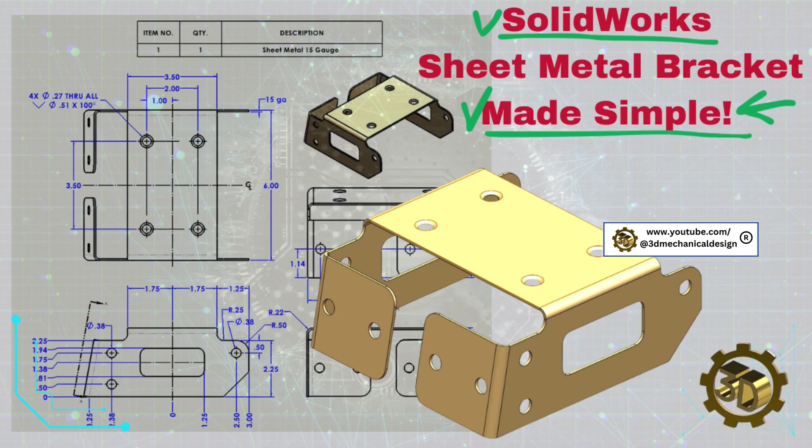Let's begin by reviewing the drawing specifications. This bracket will be fabricated from 16-gauge sheet metal. The component is symmetrical along its main axis, meaning we will model one half and utilize the mirror feature to create the complete part.

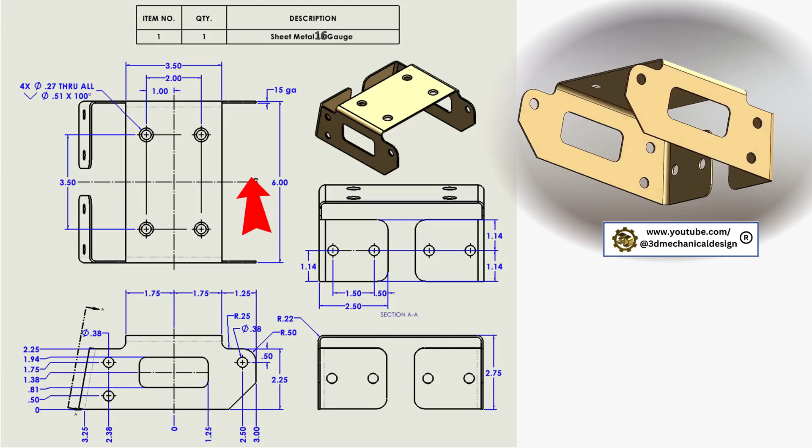Throughout this process, you'll utilize the following tools from the sheet metal and features tabs: base flange, edge flange, extruded boss, extruded cut, hole wizard, fillet and chamfer, and mirror.

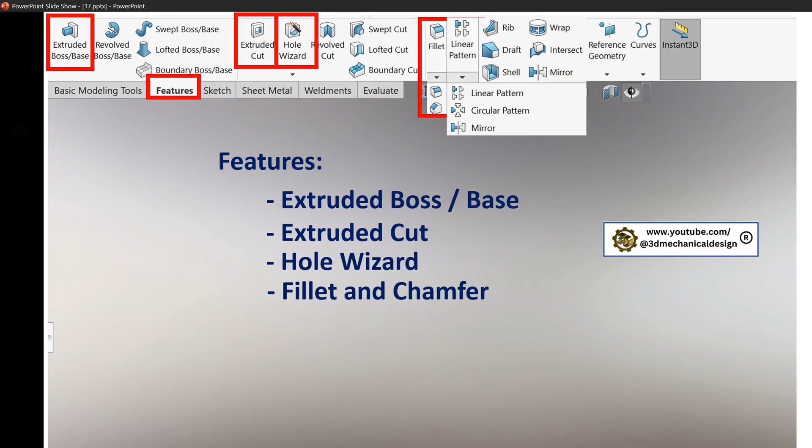Let's start modeling. Initial sketch: start on the top plane and create a center rectangle with dimensions 6.0 inches by 3.5 inches.

Access the Sheet Metal tab and apply the base flange feature, specifying a 16-gauge thickness.

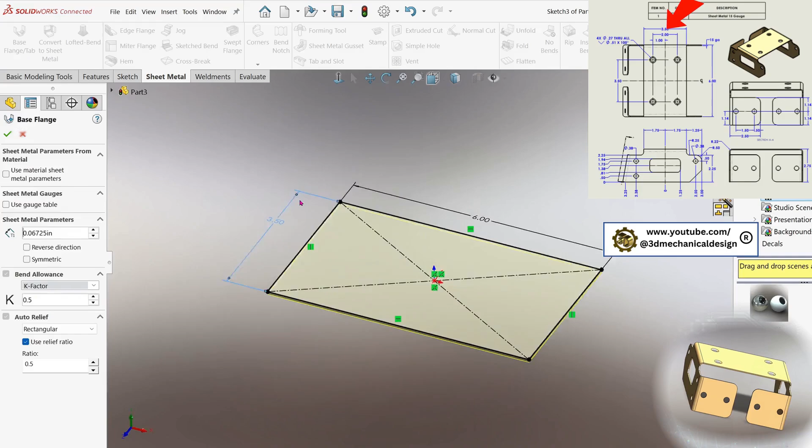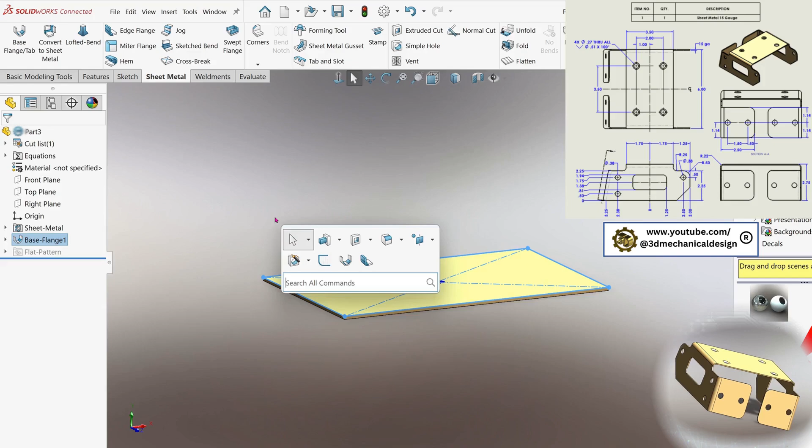Next, we will draw the side plate. Side plate flange, 2.75 inches long. Use the edge flange tool to create the top flange, extending 2.75 inches to match the reference.

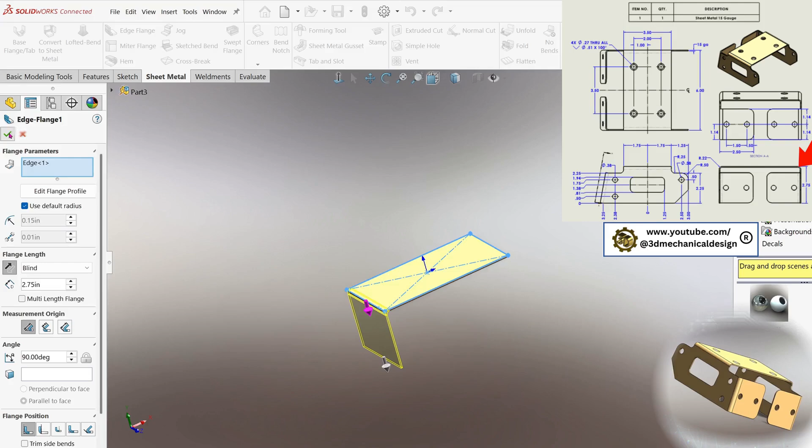Finalize the side plates by adding the right and left additional material. Add right side plate parts measuring 1.25 inch by 2.25 inches, and the left part measuring 1.5 by 2.25 inches.

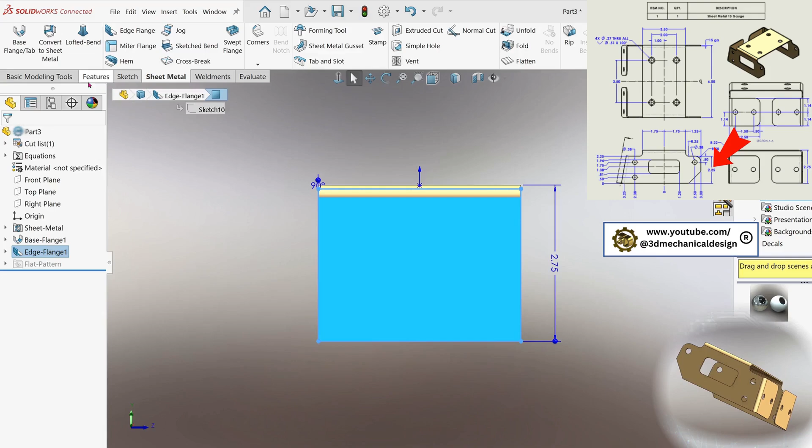Let's begin with the right side. Begin by selecting the flange edge plane on the right side of the model to establish the sketching plane. Using the corner rectangle tool, start at the bottom right corner of the selected plane and draw a rectangle with dimensions of 2.25 inches by 1.25 inches.

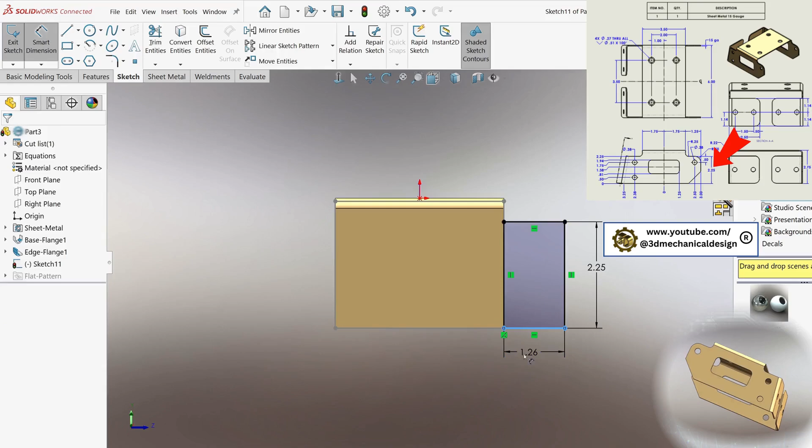Confirm the sketch is fully defined. Create the second rectangle by initiating a new sketch. Using the corner rectangle tool, start at the bottom left corner and draw a rectangle measuring 2.25 inches by 1.25 inches.

Ensure the top edges of both rectangles are collinear.

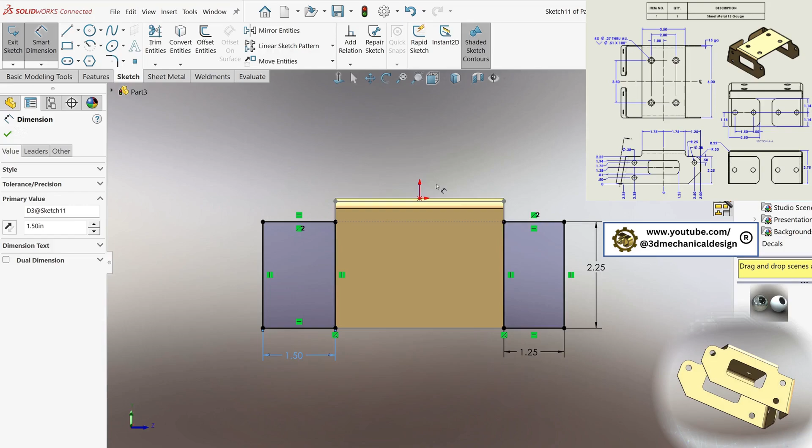Apply sheet metal base flange. Navigate to the sheet metal toolbar and select the base flange. Enable the Merge Results feature to integrate the feature with existing geometry. Verify all parameters and click OK to complete the operation.

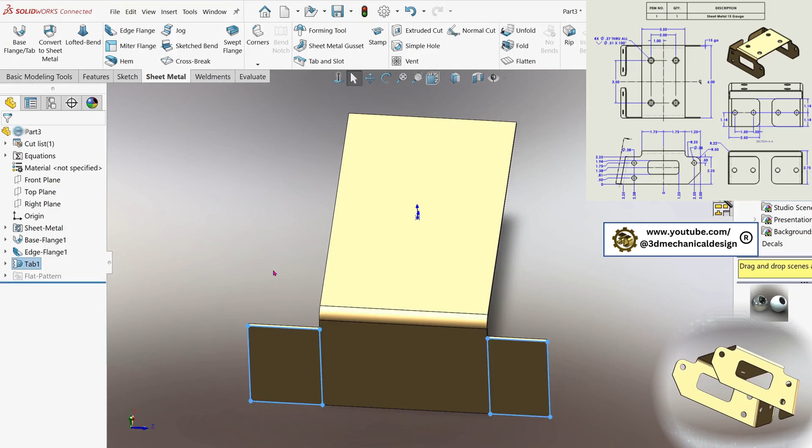Add continuous features by incorporating fillets with radii of 0.25 inches and 0.5 inches, and apply a 1-inch chamfer to the bottom right corner.

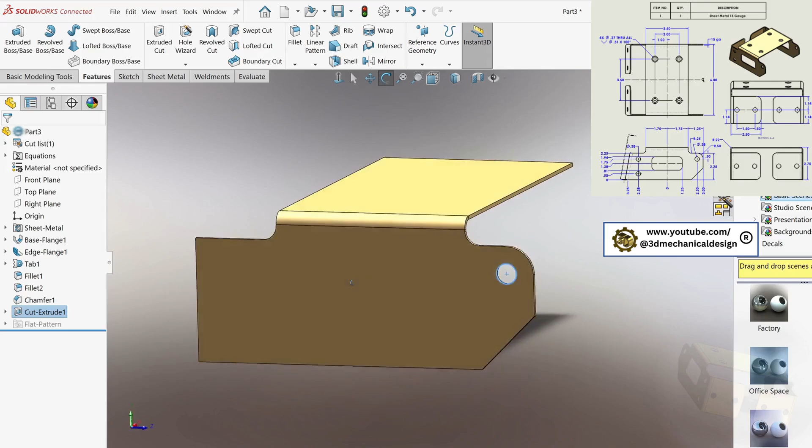Utilize the Extruded Cut tool and set the end condition to Up to Next. Once the right side is complete, continue with the left side.

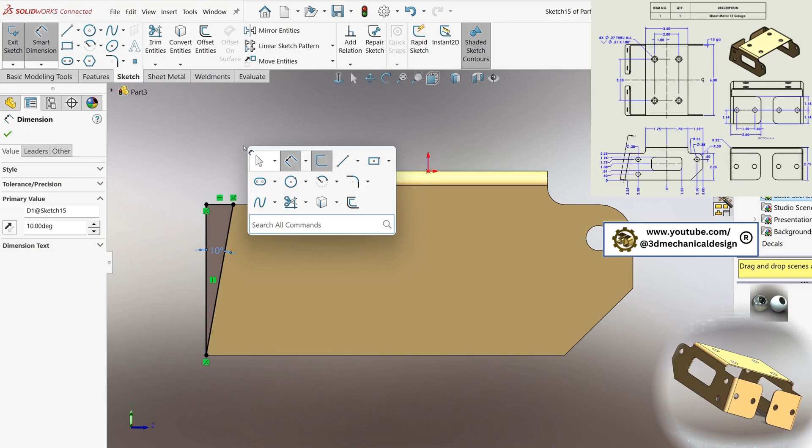To define an angled cut, sketch a triangular profile with a 10-degree angle, ensuring the new edge aligns precisely with the upper and lower corners of the part. Execute the extruded cut along this feature.

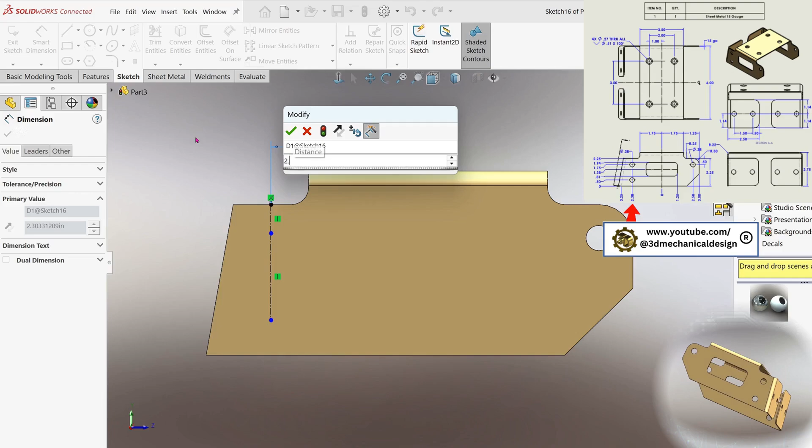Referencing your technical drawing, add 2 circles for holes on the left side, maintaining a horizontal center-to-center spacing of 1.25 inches and positioning them 2.375 inches from the part center as indicated. Ensure the holes are equidistant from the corners and both have diameters of 0.375 inches.

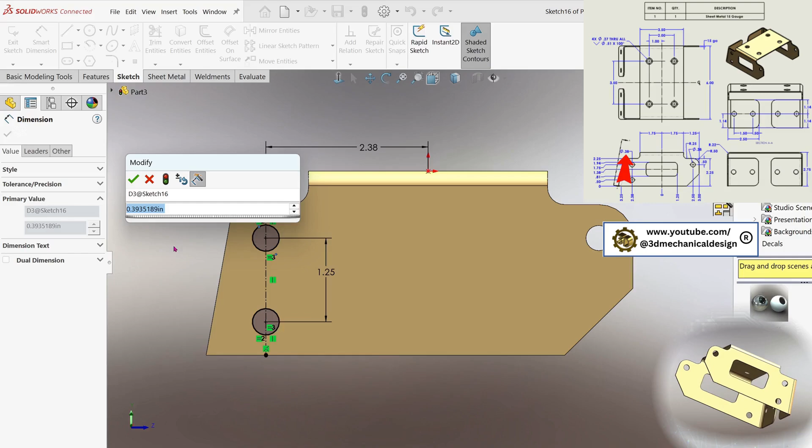Apply the equal relation to the circles for uniformity. Select the Extruded Cut feature and set the direction to Up to Next. Click OK to add 2 holes to the part.

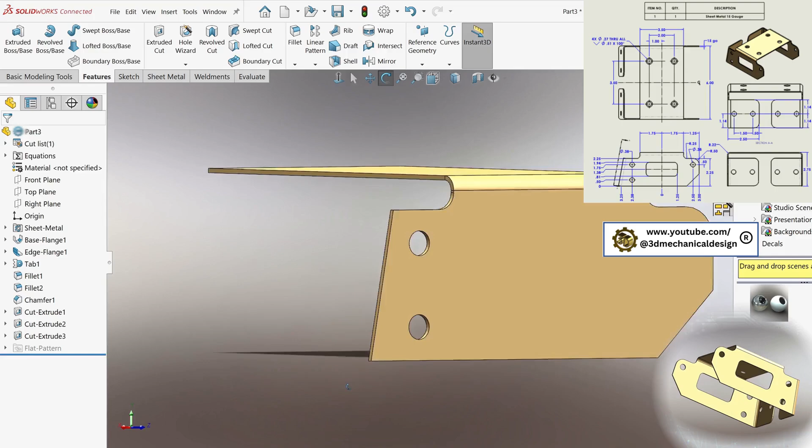The next step is to introduce a 90-degree bend. Navigate to the Sheet Metal toolbar and choose the Edge Flange tool. Specify a flange length of 2.5 inches.

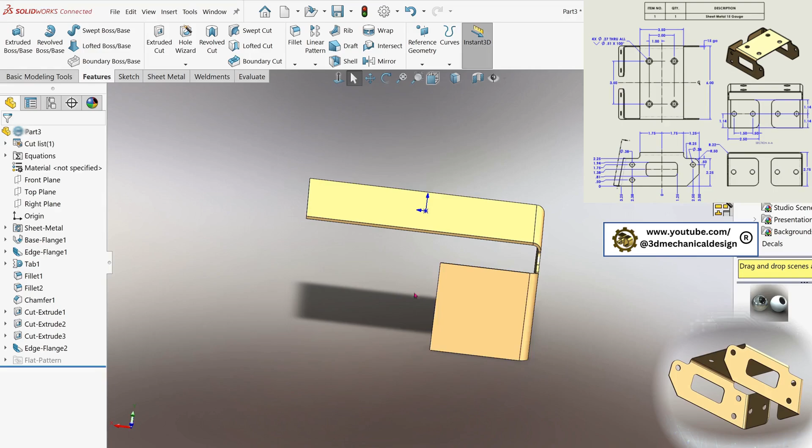Apply a radius of 0.375 inches to smooth the corners.

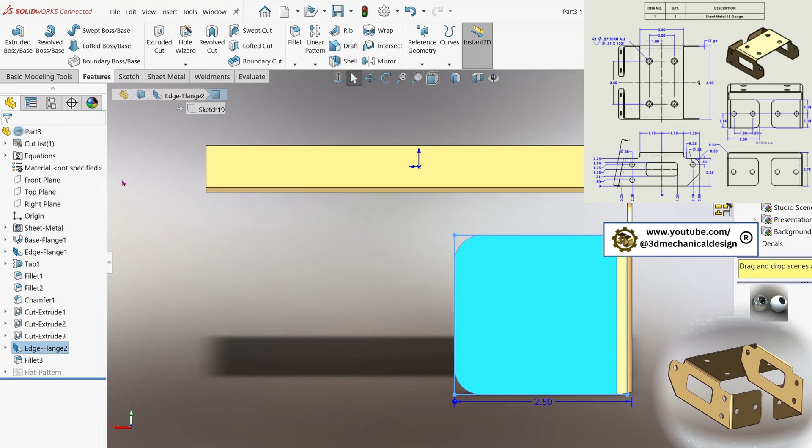Confirm the settings. Proceed to cut 2 holes with a specific diameter. To achieve precise placement, draw 3 construction center lines at the center of the part and set the outer lines as equal using geometric relations.

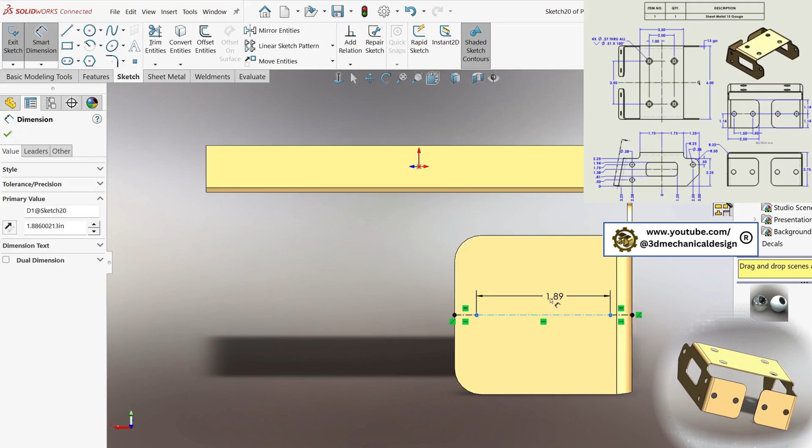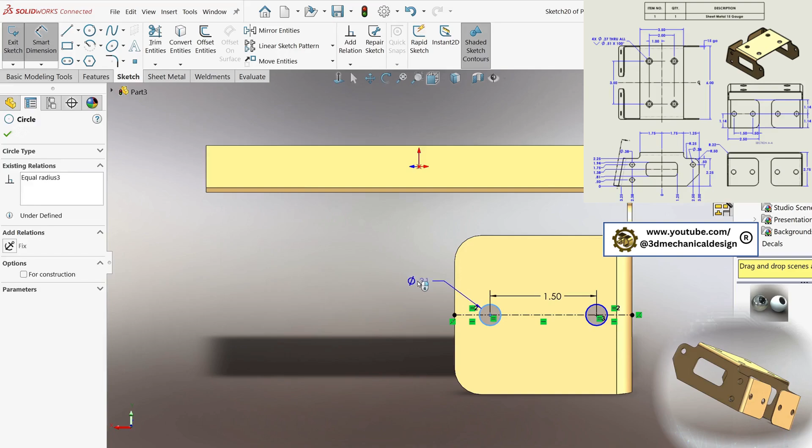Set the distance between the circles to 1.5 inches. Sketch 2 circles, make them equal, and assign a diameter of 0.375 inches to each. Use the Extruded Cut feature with Up to Next as the end condition.

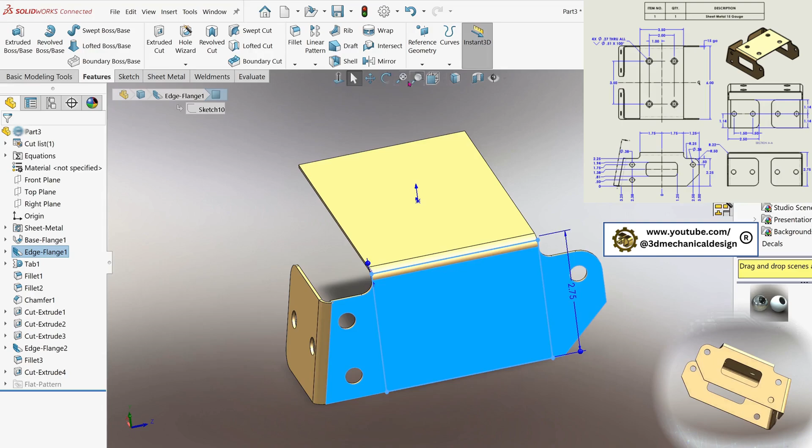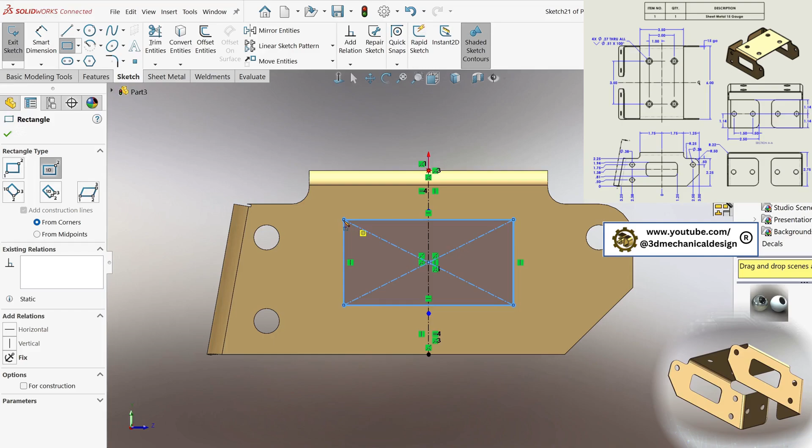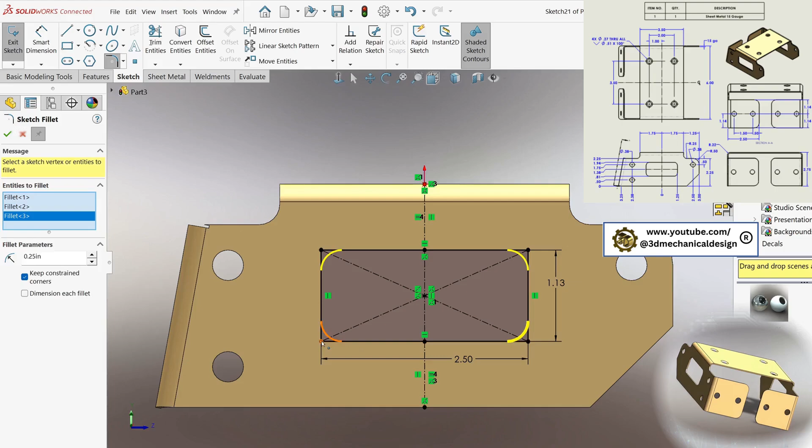On the front plane, add a rectangular cutout with dimensions 1.125 inches by 2.5 inches and apply a 0.25-inch fillet to the corners. Utilize the Extruded Cut tool to create this cutout.

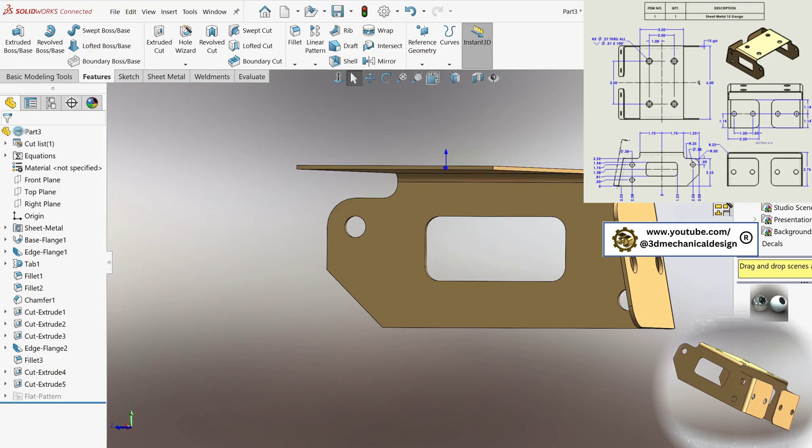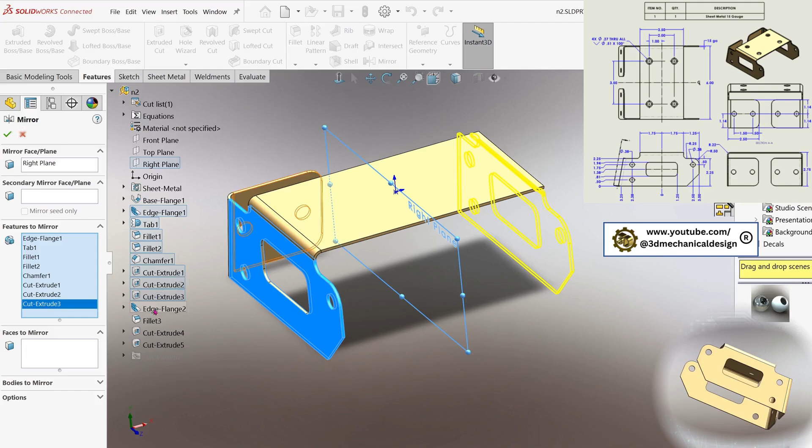At this stage, half of the model is complete. Use the Mirror tool, selecting the right plane as the mirror reference. In the Features to Mirror window, sequentially add all features used during model creation, except the initial base feature. Confirm to mirror the model, completing half of the design.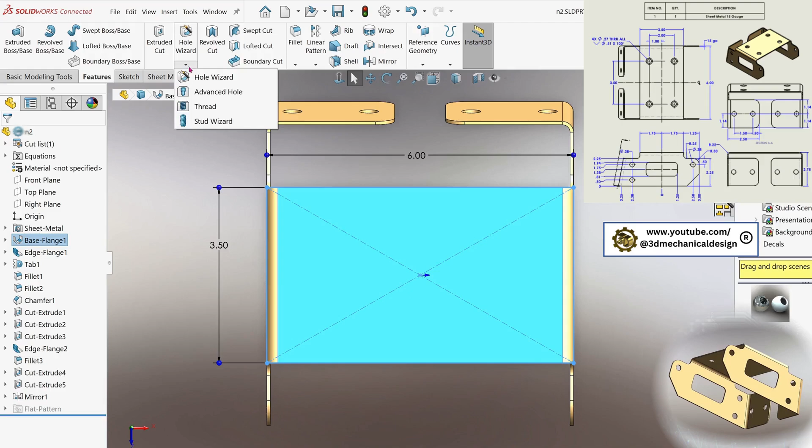Finally, add 4 holes using the Hole Wizard tool, specifying a diameter of 0.25 inches and entering the appropriate dimensions for precise placement. Verify all features and dimensions.

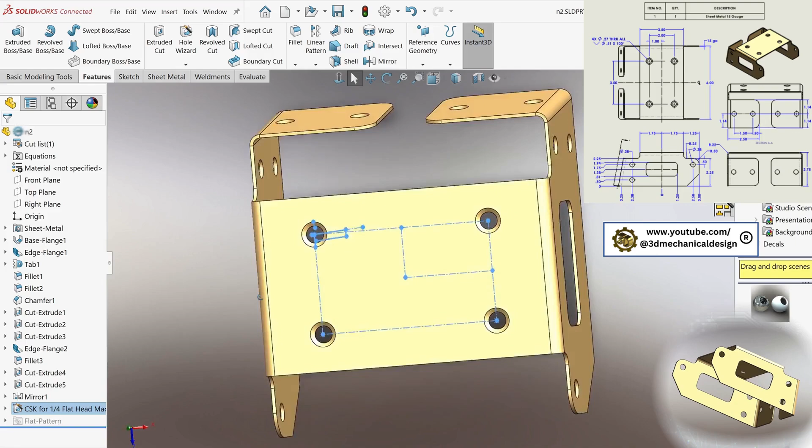The model is now complete.